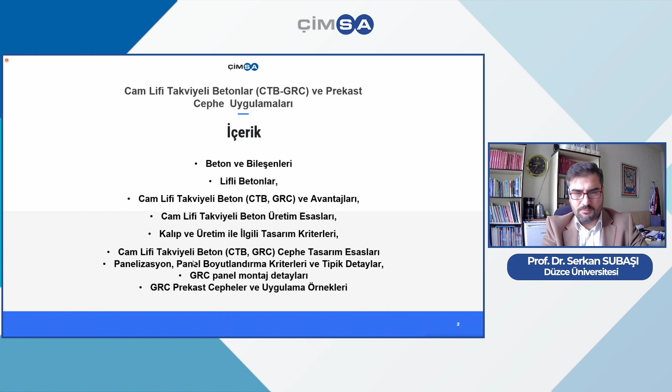When we look at the content, I'm going to speak about concrete and its components, and of course fiber concrete structures, GRCs, and their advantages. Also the concrete production features and advantages, molding and production, related design criteria, GRC type of facade applications, mounting details, panelization, precast facade, and practicing examples will be shared with you.

When we look at the components, concrete in itself is basically composed of aggregate, sand, cement, and water, and it has got a plastic form in its fluid form in the beginning. It is one of the major popular products in construction. It's not composed of actually just these three components.

There are different types of polymeric contents and some chemical contents, and also some additives or fiber type of supplementary materials. In architectural designs, some color pigments are also being added. When we look at those components, a few of them or all of them do have certain amounts which are brought together, and the design of the concrete is diversified according to these different types of contents.

When we look at fiber concrete structures, of course they do have a different resistance capacity, deformation capacity, and yielding capacity. When we compare and contrast, it has got some important features.

In order to enhance and empower the structure and make it more resistant in different parameters, different types of additives, polymeric or mineral type of natural organic fiber sources are being added in the content. Low amount and very homogeneous fiber structures provide an opportunity for shearing capacity, increasing the level of resistance, and bringing a better outcome in appearance.

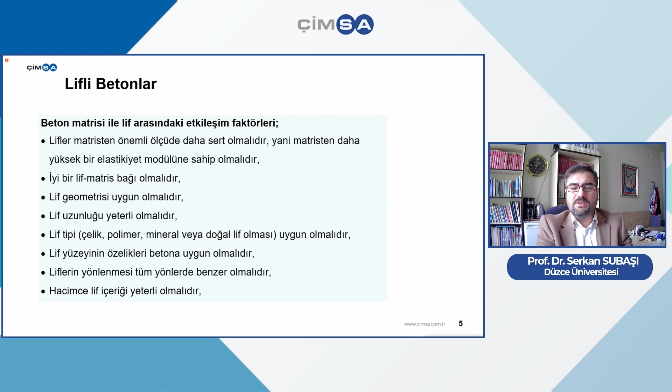Some of the molding regions are not, of course, distributing the fibers in certain directions. And those directions of the fibers in different axes, of course, bring a weaker or a stronger structure. And for this reason, it is very important to look at the volume of the content of fibers.

And when we look at the ratios for abrasion and for corrosion, and also when we look at the bending, it is reaching up to 200. And when we look at the cavitation erosion resistance, it is changing between 200 and 300 with the adding of the fibers.

And of course, there are different types of fibers, which you can see on this table. Generally, the steel fibers are preferred majorly in the field, and for their volume, weight, and also mechanical features, they bring out a very high level of performance. And especially according to the developments of fiber technologies, different producers have new fiber sources, and every other day they are gaining superior features and enabling us to create new concrete types.

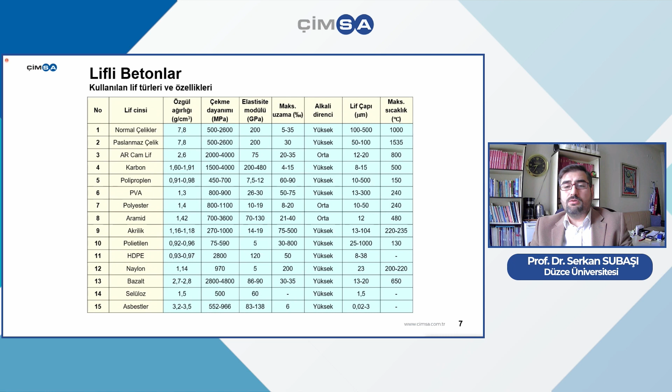And actually, what is important for the reinforcement of the concrete? Reinforcement of the concrete is enforced with glass fibers in this topic. In order to create the concrete blocks, by making use of some steel sticks and with certain integration of different components, it is possible to reinforce the concrete structure. But moreover, it is possible to reinforce the concrete by adding glass fiber.

Besides the steel fibers and, of course, alkali glass fibers and basalt and carbon fiber types, different fiber technologies at different levels may be added, and different features of the concrete can be reinforced. When we look at it in a simple way, as you can see, a simple structured concrete, there is a structural change when it doesn't have any constraint and straining contained. And of course, when we look at the energy capacity, it is very high in the deformation rates, and cement composites can be gained from the structure.

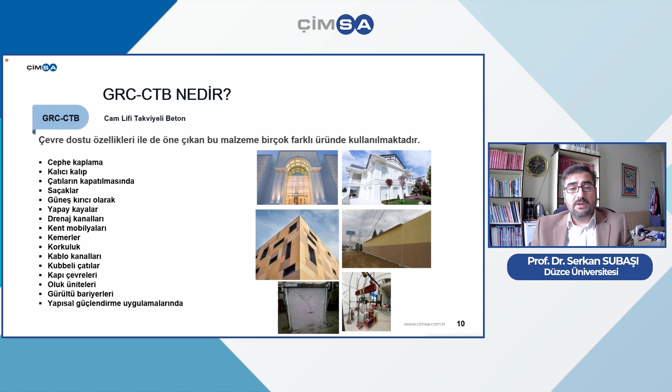And last but not least, recent research points out that in structural reinforcement practices, glass fiber is providing a great opportunity in the renovation and restoration of historical buildings, and also in different types of concrete reinforcement activities. It provides a huge opportunity.

When we look at the technical features and compare them, pressure resistance is 20 to 50 in normal concrete structures, but it reaches up to 50 or 80 in GRCs. The most important feature is the bending resistance, of course. The LOP value in the matrix structure shows us the resistance until it cracks, and it is approximately 10 megapascal. And when we look at the bending resistance MOR value, it reaches between 18 and 30.

When you produce these concrete types with woven fibers, these values rise. It is possible to make them better. The elasticity modulus is approximately 10 to 20 gigapascal, and water absorption is 3 to 10. In GRCs, it is possible to make the absorption level lower. Because of its structure, it has a carbonation depth in millimeter values, and the thickness changes between 10 and 15 millimeters in facade coating. There are some thicknesses below 3 centimeters. The density changes between 1.9 and 2.2, and the weight changes between 25 and 45 per meter square.

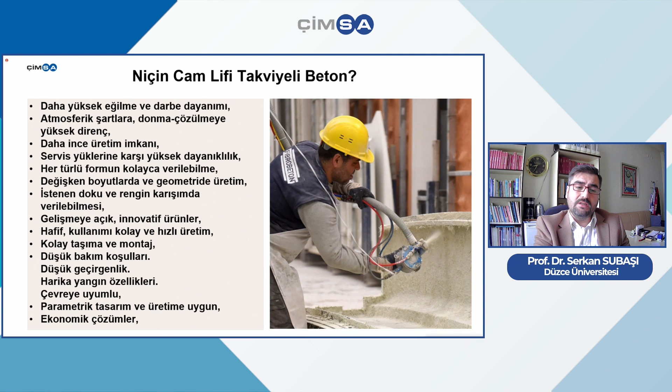The architectural world is really in favor of this product because of its diversified options, and it is increasing day by day. In maintenance conditions and different structures, it brings an advantage. It has a visual advantage with its colors and appearance. It has a very diversified color scale. When you use it with white cement, it is possible to use different combinations of color pigments, like terracotta tones, for example, in different varieties. These coating concretes can also be colored afterwards, multiplying the color scale.

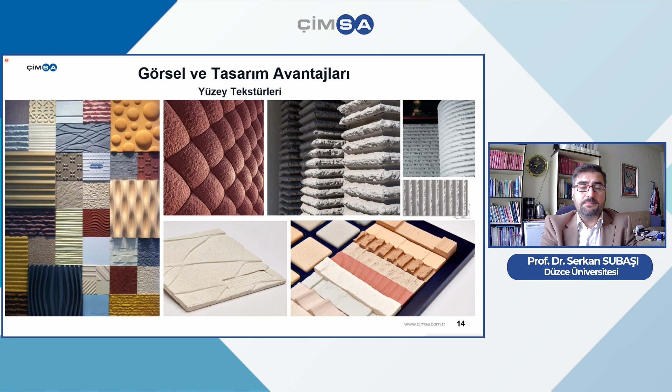The surface texture is a very important feature. The surface texture is related to the molding technology. Any type of surface texture is possible to shape glass fiber reinforced concrete, and molding applications starting from wooden molds to polyester and polyethylene types can be used during production. The thickness, depth, and size of the molds change. When we look at the sizing of the forms, it is an extraordinary, wide-scaled, and very thin layered type of product. So it's a very special type of concrete being produced.

And the major limitation is the logistic limitation. The architects are in need of such kind of aesthetic features at any size or at any structure. It is possible to obtain it. However, the transportation of these products is really making it hard to be managed. That's the only problem that can be counted.

And when we look at the finishing surfaces, it is an aggregated finishing surface agent, and it is bringing different advantages because there are different types of applications which it can be applied. One of them is the sanding application. Different designs and textures are being created, and also acidic bath is another type of application.

And another important feature is the retarding. As a retarding agent, it gives a different structure, and with pressured water, different types of finishings on surfaces are possible to be obtained.

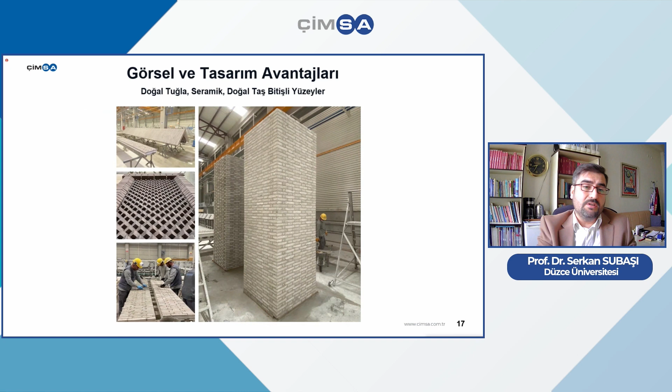And moreover than that, when we look at the surface features, natural types of ceramic tiles are able to be applied. So it is possible to produce shell-like structures, cross-like structures by the help of glass fiber as a coating material.

And glass fibers are changing between 4 and 5. And when we look at premix types, it is 2.5 and 3.5. And water cement ratio is 30-35%.

There are different types of basic applications, like, of course, the spraying technology, which we use. And other than the blasting technology, we do have the premix technology, and it is more durable for shearing resistance. And the homogeneous structure and also the hardness of adding fresh concrete inside it, the sizes are declining to maximum 6 millimeters or 25 millimeters. You see the application in the premix situations.

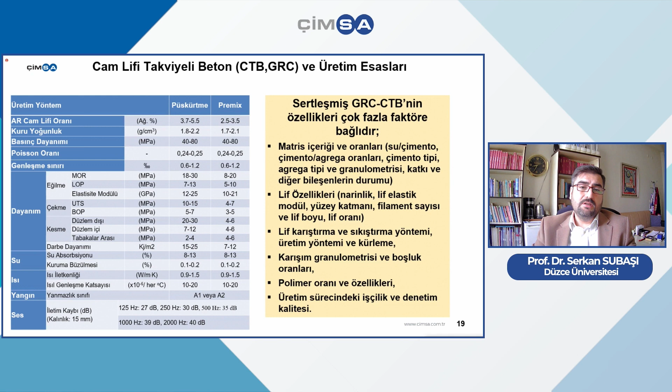And of course, another important methodology which defines the structure is curing, and also the chemicals inside the mixtures. Without spending any further, polymeric features or structures are possible to be used. And of course, the quality of the laborship and also the inspection is making it possible to obtain a better quality.

And when we look at the concrete structures, according to the study in these molds, we have glass fiber reinforced concrete used in these molds. Now it will be put on a steel carcass, which will be installed to this concrete molded material, or it can be directly solidified with the concrete from this carcass as well.

After the use of sidings, the logistics comes into place, and under appropriate conditions, their transportation can be made. Of course, in the field, the installation teams also can very easily install it to the carrier systems by use of cranes.

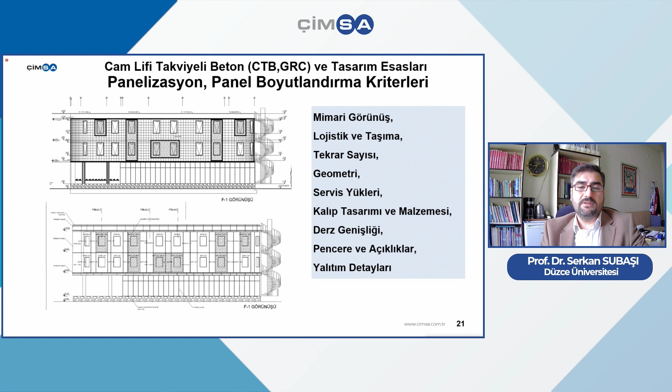Various production methodologies can be chosen according to the designs. Of course, we have to look into the geometry, the service loads, the window placements, and similar issues as well. As you can see here, various forms can be produced for surfaces, especially for amorphous surfaces, through different molding performance, let us say. But all these molds that are prepared either from polyester or polyurethane can be used to mold concrete and then finalized with a spray as glass fiber reinforced concrete works.

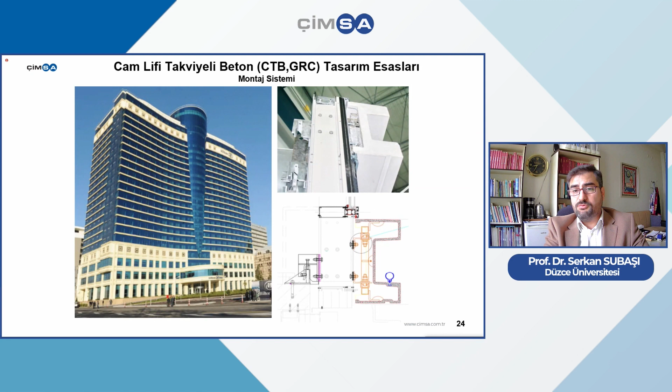Here is the steel carcass system on which it is installed. As you can see, during the installation, in a safe and secure way, the structure is fortified and solidified, designed together. Of course, when designing these connective structures, we need to be sure that the special requirements of safety are also met under utilization conditions in the world. There are various installation equipment producers worldwide who are complying with these safety procedures.

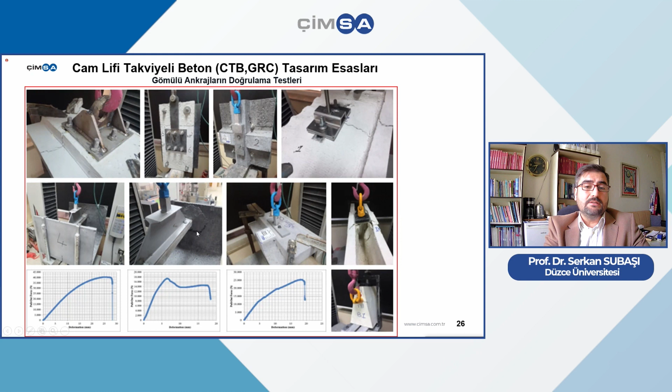As you can see here, the production of the equipment is also important in the installation stage, and the equipment necessary for installation is tested to see whether it has the performance stated in the project briefs. So performance tests are applied also to the installation and reinforcement factors. About precast siding in the systems where these details are solved, you can see here the structural examples.

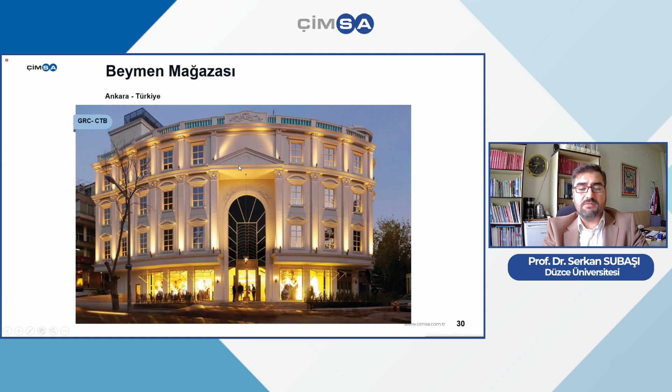For example, in our country, Mardan Palace, the sidings here were applied with glass fiber reinforced concrete. As you can see here, there are much more complex examples of these sidings as well, with various methodologies. Different fixtures and designs can be combined. This is a building from Ankara. You can see here the entire siding except for the windows is carried out with glass fiber reinforced concrete.

This is from Moscow, a swimming pool project. I would like to draw your attention to the artistic side as well. You can see here many artistic works carried out for the sidings, for the facades with the concrete factors. These are all quite lyric in their applications. Another example from Antalya. Here you can see the outer siding combined with lighting factors for a beautiful application as well.

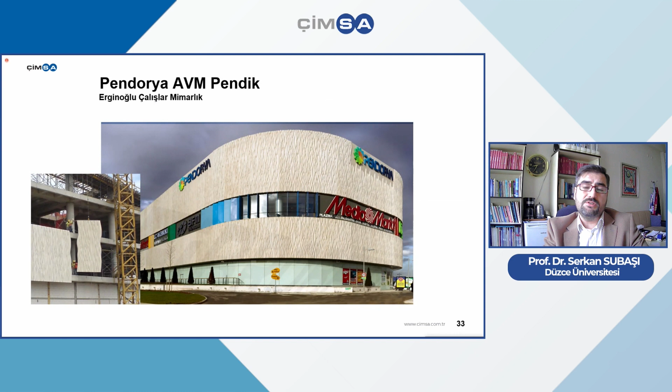Here, another example from Istanbul, Pendorya shopping mall, for the outer siding, one of the different methodologies and molds, with quite an aesthetic view. Apart from these, another example from the world is the Parliament building of Georgia. You can see here the entrance is again a full shell designed with glass fiber reinforced concrete.

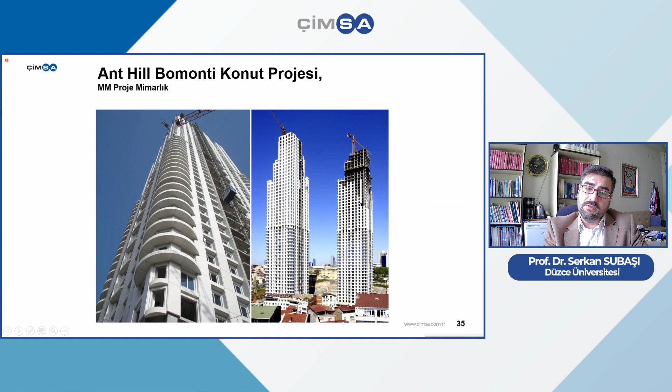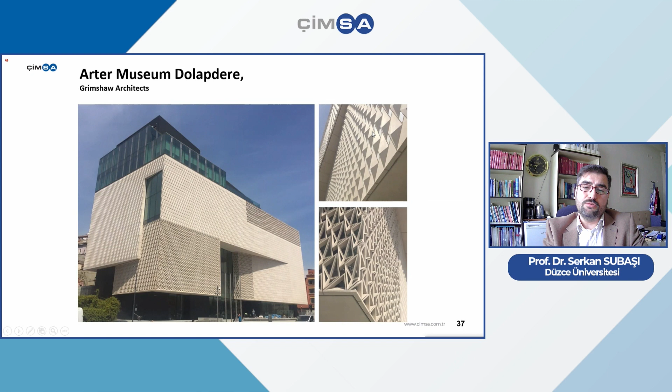Again, from our country, a residential project here for siding with glass fiber reinforced concrete. Here is another project for the outer siding, an example of similar methodologies of concrete. Here again in Dolapdere Arter Museum, for solar deflection as well as other advantages, this outer siding was preferred. Here again, the project East Marina has preferred these white colored elements for outer sidings.

I hope my presentation was beneficial for you. I thank you very much for your interest. And if you have any questions, I would be happy to answer them.

We would like to thank Dr. Subaşı for his very informative speech. We do have a few questions. As you know, white cement is used for precast and is already in the market. The implementers are saying that there are some cracks with GRC applications, especially for wide and broad application fields. What should they be careful about in such cases to prevent it?

Of course, cracking in concrete is actually an indicator that the cement design and proportioning is not appropriate. Maybe the percentages of the agents, the expansion agents, or other additive ratios need to be checked through a detailed analysis. And I believe that when these rates are correct, there will be no troubles.

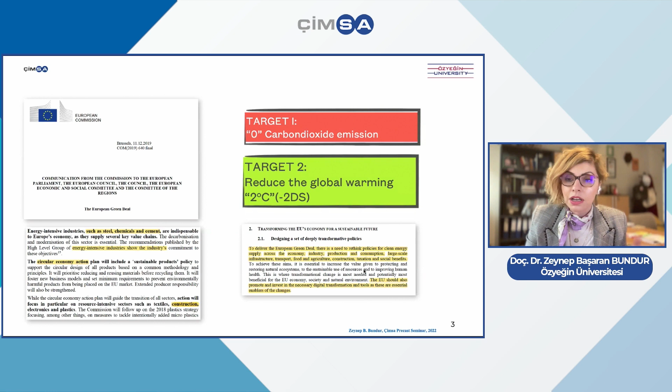Today, I will be talking to you about the state of things as well as what we are doing to keep up with it. As everyone mentioned, in the construction sector at the moment, one of the most important focuses is on sustainability, and it has to do with waste management, and usage of green material is already on our agenda for sustainability. But now we have targets as well, which were determined by the Paris Accord and the commitments for zero carbon dioxide emissions and, of course, reduction of global warming by 2 degrees.

And it's also a very keen commitment. This actually requires what we call a breakthrough. We have our task cut out for us as the producers, as the designers, as the academia, because it requires a very different outlook towards this sector. According to the most recent reports of the EU and the academia, it has to do with 2 steps. The first step has to do with breakthrough developments: to have the cement industry or the construction industry actually capture that carbon dioxide and give it back to recycling. This requires very high budgets, because we have very high capacity production as well, and it is highly costly as well as very difficult to implement and to practice.

And the second step has to do with the management of the waste of cement factories, maybe reuse of this waste material, or usage of waste aggregates for, again, cement and concrete production. And last but not least, very important for this webinar as well, is structural optimization. What's important at this point is the usage of precast concrete. Following in the footsteps of Europe, we see whole buildings constructed by precast elements, including the beams and walls. Everything needs to be brought into the field and used in the construction. And we need to do this as well.

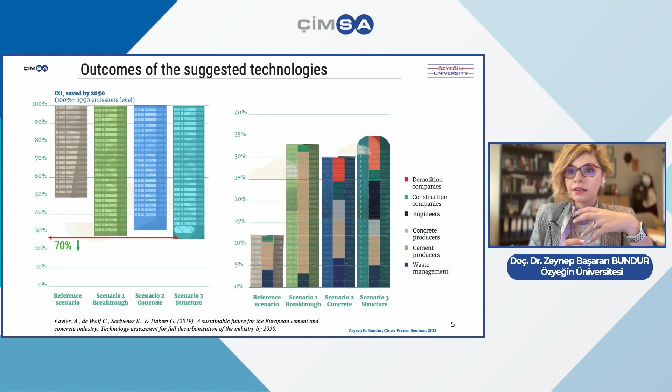When modeling this, I couldn't really get the transportation part, because I don't know whether the carbon footprint of the trucks and transportation costs during this circular economy was also included in this report or not. But in total, we see that this is a very efficient methodology, completely aligned with the Paris Accords as well.

And so in that sense, we see we need a very broad perspective towards this, where everyone can take their part and add it to a holistic outcome for the cement industry.

And I wanted to also talk about what we are doing at the moment with our R&D applications and practices, because in the future, we can even be in a position to construct a one-story building only with 3D printing. This is actually what our R&D is focused on.

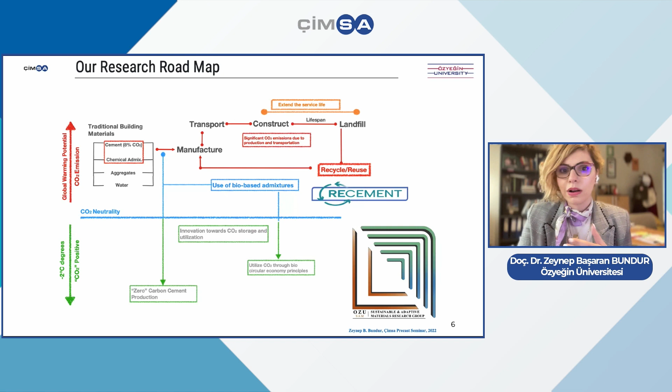Sustainability towards zero carbon dioxide is the utilization of recycled materials and reuse of waste materials, and digital manufacturing through 3D printers. Actually, what we're doing is not truly digital manufacturing, it's still 3D printing, but there are many steps as to how we can optimize this in field construction, factory construction, and production and manufacturing, combined manufacturing, mixture manufacturing.

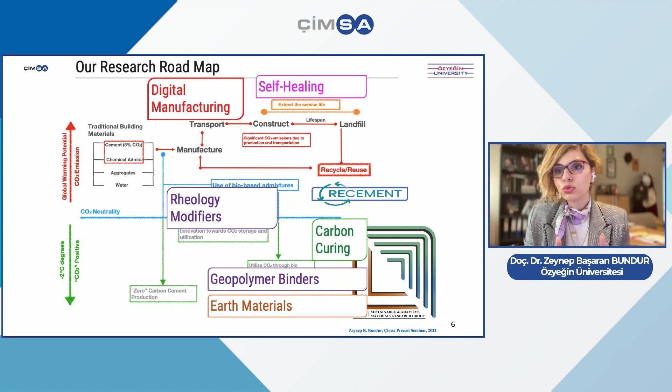And this is all very important, and also reuse in that sense, of material which will allow for a longer lifespan. And besides lifespan, we need to have concern for the environment, using less additives and less agents and less extra material, and using geopolymers as binders or earth materials for additives. These are all part of the R&D processes that we are carrying out at the moment.

These might seem a little too much of a fantasy at the moment, but it is on its way, it is in the pipeline. I want to talk to you today, for example, about what we are doing with concrete through 3D printing.

It might sound like a very recent application in the last 5-6 years, but it has a long period of preparation in the 20th century, especially in the background.

But what is going to be the perspective? Are we going to print precast elements and combine them in the field, or are we going to have this printing process carried out in the field itself? What kind of advantages do we have?

There are no molds, there is no waste material, so actually it optimizes resource utilization, and it is fast in terms of manufacturing, and it is reducing labor force as well, and thus increasing safety in the manufacturing area.

And as for cost, it's a question mark. I can't say it is actually cheaper at the moment, but when you think of the cost of molds and the cost of labor force and other areas and waste management, we can say that it is at least break even, maybe, because you don't have to use molds anymore. You can get one 3D printer and use it for a very long time to print various materials.

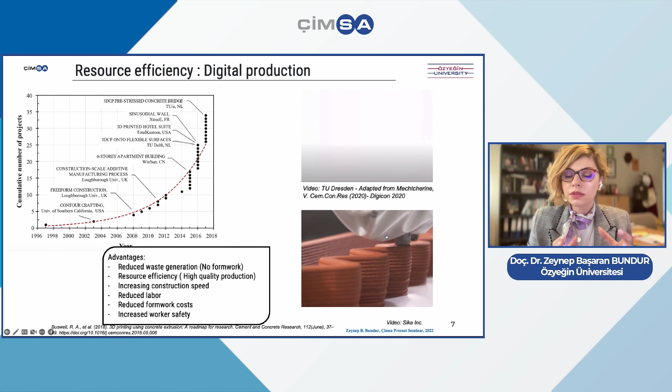Or you can have a much more fluent material produced and printed through extrusion, in a very fast methodology. So we don't have a single right or wrong or appropriate material for printing, because there are different types of printers, and different types of materials can be printed based on the types of these printers.

And the material needs to be reworkable, and this is actually the thixotropy of the material in itself. This is a system in itself. The material and the printer need to be in communication, and an optimization process and coordination process has to be carried out for this. We can play with the materials using chemicals, and maybe use the timing of the finishing.

We can use fiber to reinforce it, especially for early stages, and we can rework it through clay. Everyone has a difference in terms of design, but at the end of the day, it comes out of a nozzle and it is workable and printable material. In that sense, it is an optimization. From the printer side, we can have a tank design for printable material, pump design for material transport, and nozzle design for the printing resolution.

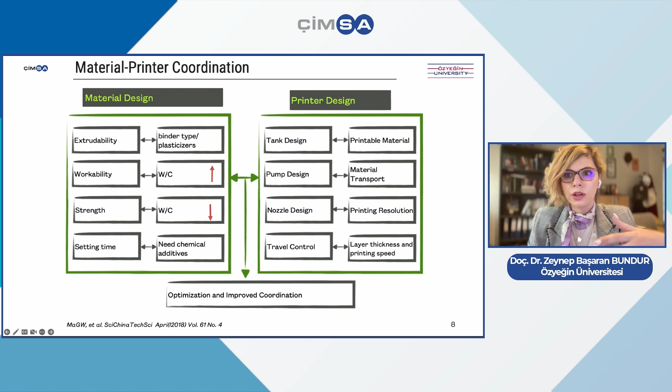We want to have this easily very practical in the field. So not a gantry type, but a different type of printer that could be more practical in the field. We're trying to include the printers in this renovation phase, in this R&D phase.

What about the speed of the printer and the alignment of the speed of the printer with the structure of the material? We can have a material design for each printer, and we can adjust each printer for different types of materials. So in that sense, they're interchangeable.

What's important here is that it's extrudable, so fluid enough to be extrudable, but it also needs to be workable. It needs to have a basis strength initially, to be able to have a strong basis and fundament. So it needs to be fluid until it comes out of the nozzle, and after it comes out of the nozzle, it needs to be printable layer by layer. That's where the chemicals come into effect.

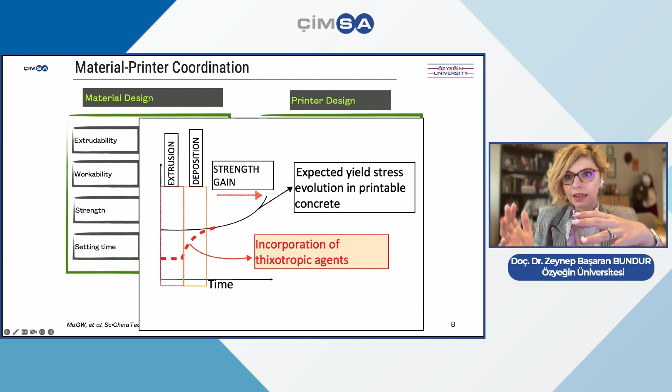After the printing, we need to have a yield stress evolution in the printable concrete. That's where we need incorporation of thixotropic agents and properties. We have different approaches in that sense.

Here, we can have ordinary Portland cement, and we can have mineral additive and calcium aluminate cements as well. Geopolymer mixes are very advantageous here because they can provide instant workability. Some revalorized end-of-life materials are sometimes very important. Biological additives can also increase the extrusion properties. Nanomaterials are also possible to use, so the concrete design is also adaptable to digital manufacturing.

This means, in fact, that the world is moving towards digitalization on one point, but to be able to do that, we're taking a step back from sustainability in terms of being able to print concrete through cement, using more excess cement. So we need to have renovation and R&D exactly at this point. We need to work on how we can reduce the impact of the carbon footprint for this digital manufacturing. This is where the geopolymers come in, and this is where the biological factors come in to replace the ordinary cement.

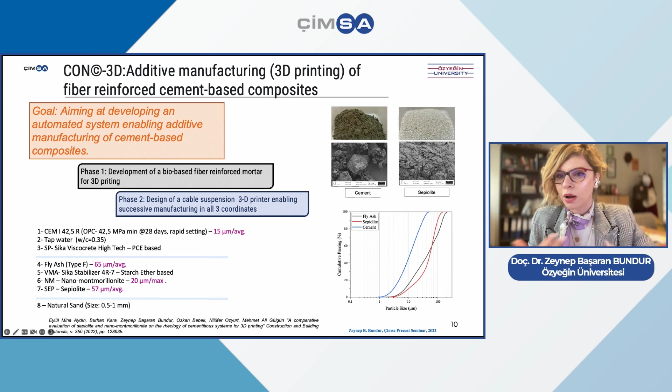We also tried a nano clay to see the differences in our project. In that sense, we can have shear rates, as you can see here. It's a little bit specific, but you can see the values.

When we look at quality control for 3D printers, we can have shear and slump and pressure resistance for standard concrete as well. That's actually the basis. The challenge is that there is no standard quality control test as well.

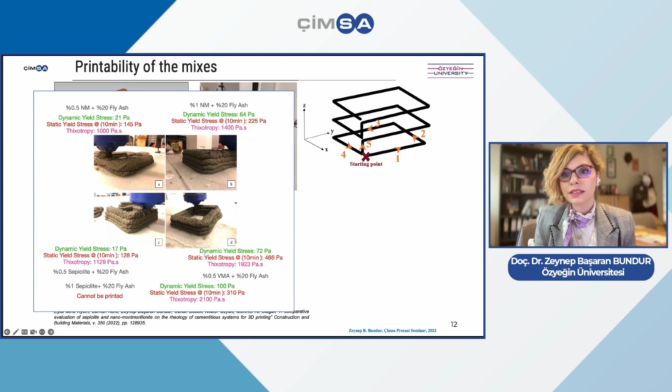So we thought there needs to be a measurement system for this, a quality control system, which needs to be integrated into the printer itself for effective usage. We thought that in a closed loop, we can have a quality control system applied to the printer itself, not just for the mortar or materials, but for the printer itself, to enable both to optimize themselves within a closed loop system.

Here we see that our own printer that we manufacture has different properties, and we see different analyses for printing material for different extruders. We determined maximum and minimum values within which that printer can be used for that material. And also there is another biological additive factor—mixtures, biocrete, for biologically positive cement—and its bacterial cells related to rheology modifiers.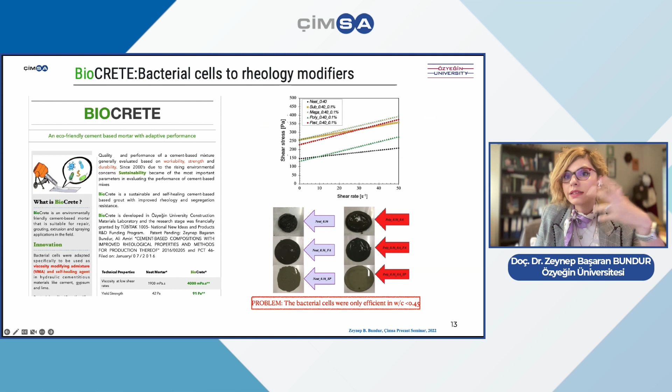It does have a few challenges of itself as well. The innovation in our project worked based on solving these challenges, and combining sepiolite—adding a certain amount of sepiolite and bacteria to the mixture—was a positive outcome for our study. We didn't have a too thick mortar, but not too fluid either, so we had a very appropriate mortar and flow.

I don't know what kind of molecular difference there is—I cannot explain the technicalities of this—but we had a wider printable area through this. And all this material allowed us to have a more homogeneous outflow.

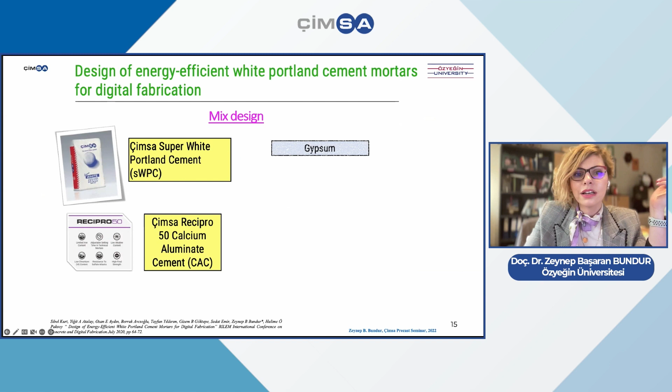How did we start this 3D printer? By the help of Çimsa, we started. We started with Sibel Hanım, with a white cement, a white Portland cement, and Çimsa's Recipro 50 calcium aluminate. We tried how we can make it white, and at the same time, how can we provide an energy benefit—can we bring a social benefit? We started just before the pandemic, a few months before, but we had some very good results before it started.

Çimsa's general design parameters, like the use of gypsum and sulfate, and powder dispersant and super plasticizer, have been used. Silica sand, polymer additive, and polyamide fibers were used. We designed a white cement, and at the same time, phase-changing materials were added in order to provide energy efficiency. Because of their round shape, they helped us during the extrusion phase.

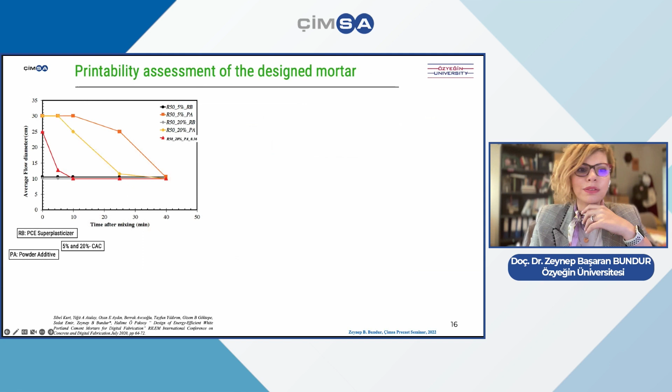We started with some small experiments. We could not bring them to rheological experiments—it was just before the pandemic. Different types of parts were produced. What was beautiful about it? According to the dosage that we wanted, we were able to wait 5 minutes and print it, or wait 10 minutes and print it. We were able to change the nozzle sizes, and they worked in different ways.

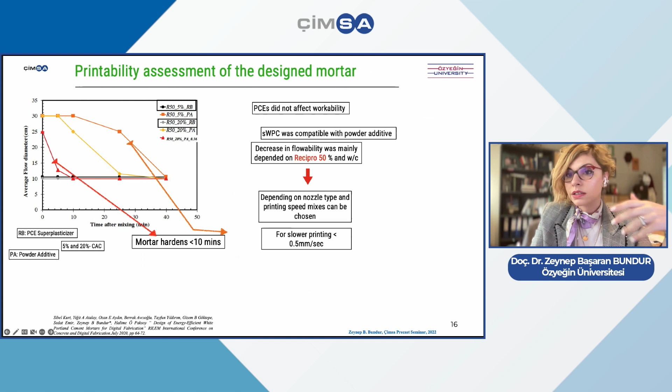Is it possible to squeeze it? Is it possible to use it in different nozzle diameters? How fast can it be? It was speeding up very easily depending on nozzle type and printing speed. It was possible to have a very fast printout, and we achieved this result.

The other project started later on. This was the first step we started with, and we learned a lot. We made a lot of mistakes, and we learned a lot from them. However, what is the main topic here? The white cement and also the additive content, because of its environmental impact, will be the striking point. We need to approach it in an environmentally friendly way.

And for the cement, what we are actually committing: we are developing bio-based healing agents, and for more than 10 years we are developing these products, and also facade coating and also powder additives, and also to implement technology with geopolymer mortars to reduce duration of heat curing for geopolymerization and improve the printability of the mortar.

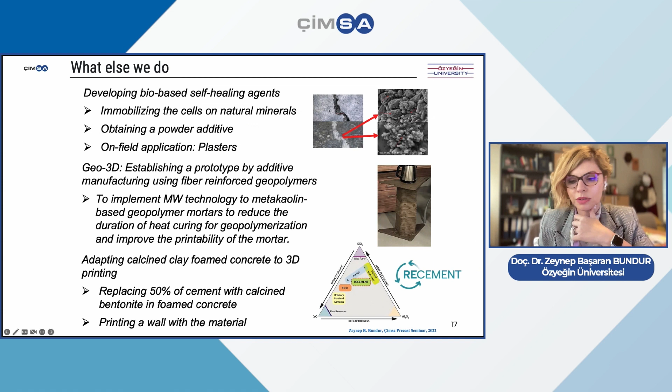We have applied a microwave, and we are producing coffee tables and also waste bins with these 3D prints. And we do have an EU project, a RECEMENT project. All of the waste of mines and ceramic and also other waste materials are being recycled and reused. We do have such kind of an upcycling project.

We are a very huge research group, not only students. We do have mechanical engineers and industrial engineers and also civil engineers. And many of our projects are being supported by TÜBİTAK.

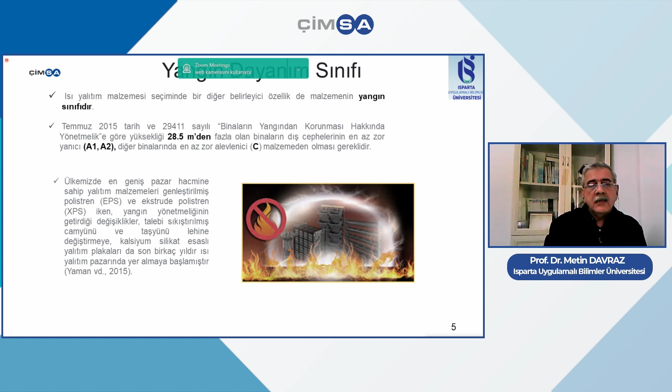And for a long period of time in our country, when we look at the insulation materials, EPS or XPS, we were using them as the extension material. Now it has been replaced with thermal insulation plasters. And when we look at the traditional thermal insulation materials, the unit price for EPS is the lowest value.

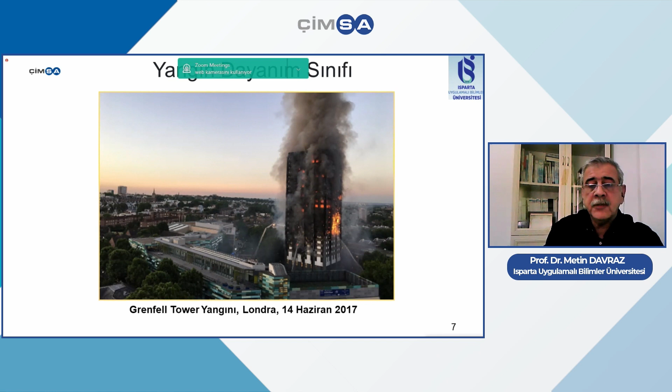And when we look at the external facades of the buildings and the fire types, for the firefighters, the situation with the flames is very hard. This is the Grenfell Tower fire in London on the 14th of June, 2017. Starting from the fourth floor, it spread to the whole facade. Unfortunately, 72 people lost their lives, and the firefighters' intervention took 24 hours to extinguish the fire.

When the building is higher than 28.50 meters, non-flammable materials, A1, A2, and also flame retardants should be used in the content. And when we look at the systems which are less than 28.5 meters, 1.5 meters should be coated with non-flammable material. And if the building height is more than 6.50 meters, then the windows, window panels and all of the voids at the edges of the building, at least 15 centimeters, or from the upper side 30 centimeters, should be coated with non-flammable barriers.

And it is possible to make use of other non-flammable materials. There are fireproof insulation materials that can be used independently on the facade of the buildings. And the traditional thermal insulation mounting approach is causing some problematic issues due to the structure of the surface, and sometimes they are not prepared according to the appropriate techniques.

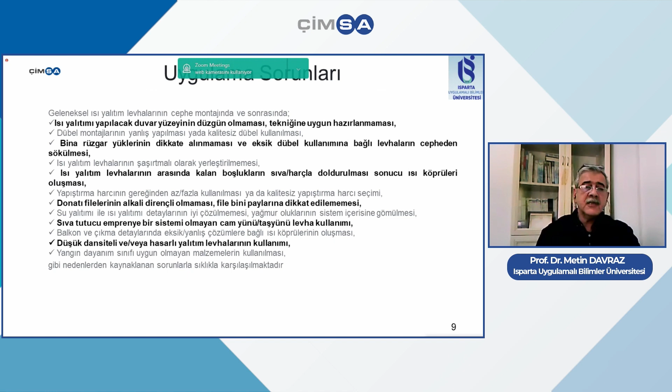And the void between the thermal insulation plates is filled with cement, sometimes with some foam. This kind of disqualified application makes the structure of the building weak. And due to different reasons, application failures, it is possible to have less insulation impact.

When we move towards thermal insulation plaster, the Ministry of Environment has regulation and legislation, and also the standard TS EN 998-1 is a standard which we cannot ignore. The basic condition of thermal insulation plasters is that it should be less than 0.065 watt. And in our country, more than 50 companies are producing thermal plaster.

In order to be named as an insulation plaster, the value of 0.065 W/mK should be provided as a standard by these more than 50 companies. We don't know the numbers.

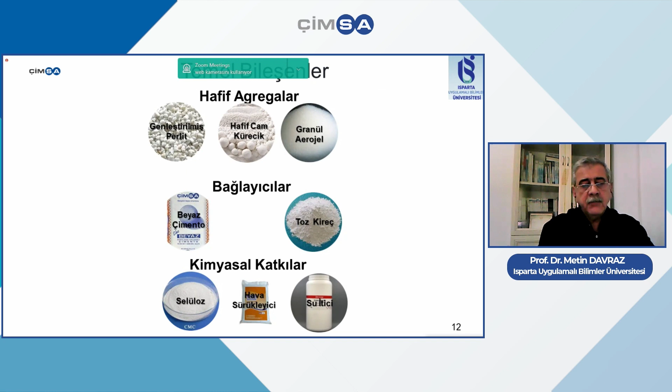And when we go through the chemical additives, CMC type of powder cellulose and also dust polymers are present. These are the basic two components. And in order to have less water absorption, we use perlite and we use hydrophobic agents, water repellent hydrophobic agents. It's a mandatory condition.

The thermal insulation plasters have 4 basic features. The hardened mortar has a dry density, and of course heat permeability is very important. When we look at this plaster type, the dry unit volume is 300 kilograms per meter cube. The heat conductivity coefficient value is 0.065, the pressure resistance is 400 kilopascal, and the capillary water absorption coefficient is, as you can see.

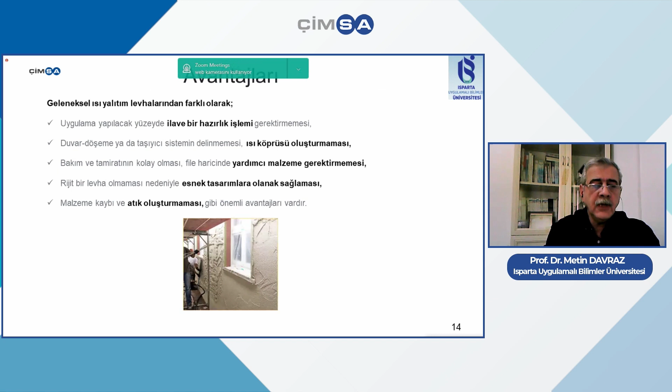Now, what is different from the traditional thermal insulation plates? Actually, the surface does not need to be prepared, and you should not drill the carrying walls, and it is very easy to maintain, it doesn't need any additional material, and it is flexible in any designs, so it is not a rigid type of plate, and of course it is not creating any waste.

Additionally, when you start to use thermal insulation plasters, there may be certain problems we can come across. First of all, kraft bags are used to transfer the product, water is added, and it is mixed manually or with a machine. The biggest disadvantage is the heat conductivity value. It is not fixed, not permanent. And capillary water absorption and mechanical resistance problems may also occur.

And we have a very low amount of studies in our country, in our literature. Only Akbulut's 2018 study is very well known. In this study, based on TS-EN 998-1, 5 different companies prepared samples from their thermal insulation plasters, and their bending resistance, pressure resistance, mechanical features, volumes, capillary water absorption, and heat conductivities were examined.

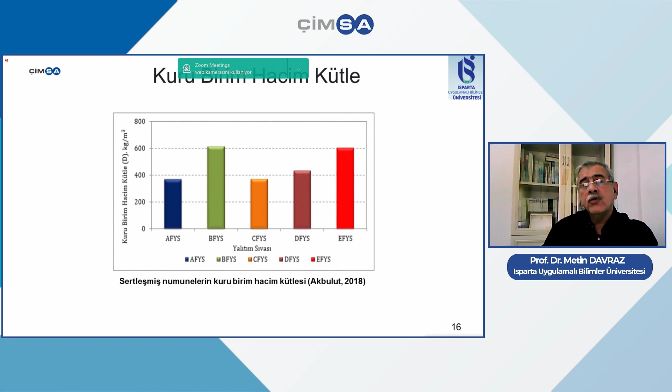The appropriate samples were researched here, and you can see 2 out of 5 samples are below the value, while the other 3 are above the 400 value. And here again you can see the water absorption coefficient for the 5 insulation plaster samples, and the results. See here, 3 of them are above the 0.8 level.

For pressure resistance, you can see it as a function of the unit volume mass. For 28 days, you can see the results of the 5 insulation plaster samples again. So 3 of them are again above a certain level. For heat transfer coefficients, we can see the heat conduction coefficient and the results of the samples. As the volume grows, its thermal conductivity also changes.

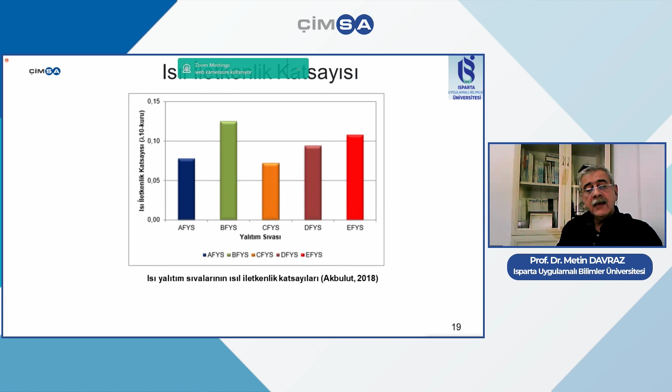2 of the 5 samples, based on the standards, are quite above the required levels. The other 3 are below the level of 0.10, as you can see here. This means that none of these insulation plasters actually meet the values given in the results here.

Of course, this is based on the specific study, but rather than responsibility for producers, I would like to say that the lack of appropriate equipment for measuring these properties is one of the reasons that misguiding conclusions can be reached in measurements and tests, especially for thermal conductivity.

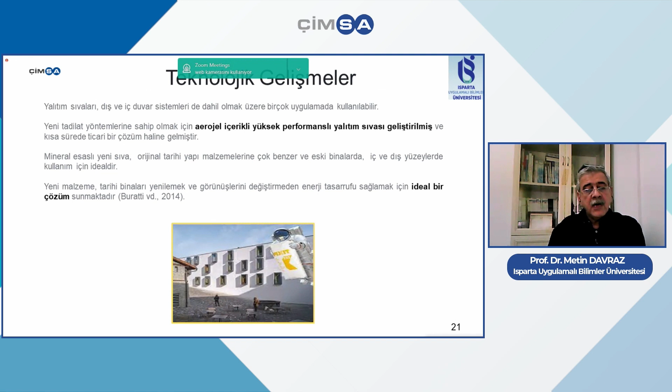So insulation plasters are products that can be used with exterior as well as interior wall systems. So we have aerogel-added high performance insulation plaster, which was developed and turned into a commercial solution in a very short time. Especially new plaster with a mineral essence can be used for original historical building materials, as well as for interior and exterior surfaces. The new material proposes an ideal solution in this sense.

In Europe, for private and special projects, since it's about Europe, I had to give a brand as well. You can check it. Fixit 222 is the brand, which is a special mineral plaster with granulated aerogel in it, with white cement, and also a high-performance binder. Historical buildings and buildings under protection are the areas where Fixit can be used for both internal and external walls.

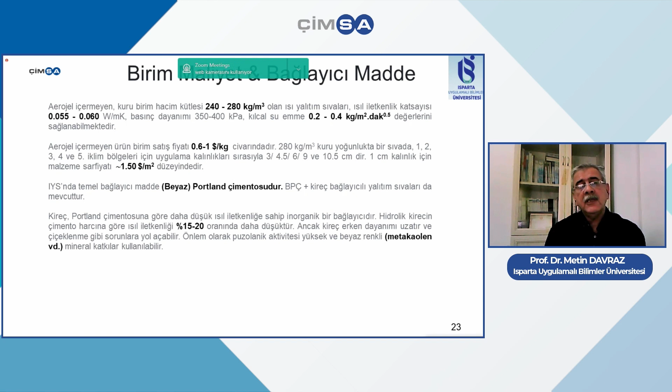So the lime ensures that there is a lower heat conductivity, as you can see from the different values on the slide. So as a result, I can say that certain thermal, mechanical, and physical properties need to be maintained. These being maintained, heat insulation plasters are an alternative material to the traditional heat insulation materials.

And of course, the producers need to refrain from misguiding statements. Quality control experiments need to be focused on, and frequent supervision and controls by authorities need to be conducted. And support from the ministry level and public authorities needs to be maintained for R&D work, as well as from institutions such as perlite producers and cement producers.

And of course, industry-academia cooperation needs to be maintained for research into the topic, and industry representatives such as Çimsa need to be very active in the research, as well as in setting the standards in the market for this new material.

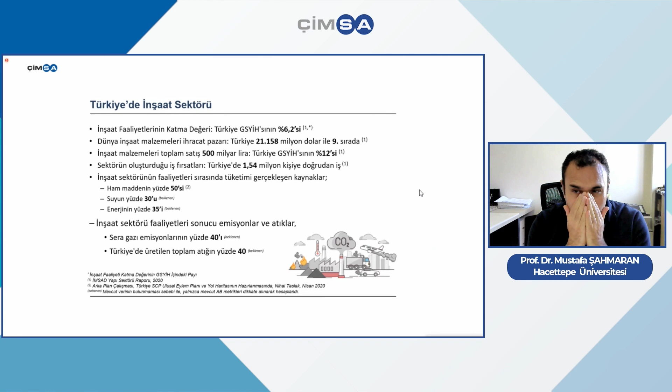So let's look into how Turkey is doing in all these regards, and after that I will talk to you more in detail. When we look at the construction sector in Turkey, as in the rest of the world, we see that construction activities are still focusing on linear economy.

So turning it into a circular economy is a main activity point, as well as more than 40% of the total waste is from construction, and it is one of the main producers of waste. We have 1.5 million people employed directly by the construction sector, and about 12% of the GDP of Turkey is from this sector. So we need to focus on this sector as a factor for environment.

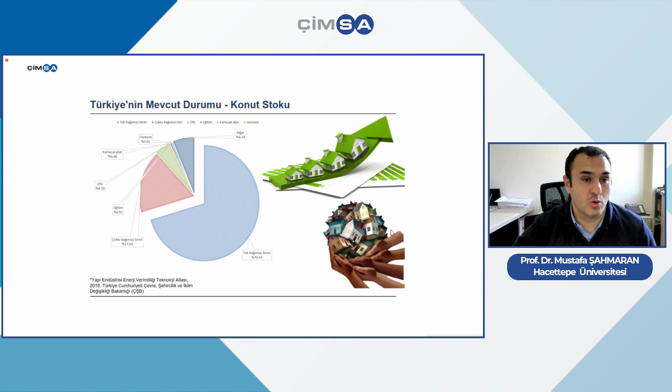So looking at the residence inventory in Turkey, we see that residential is actually a major part, and a very important part of that is actually independent residences, single residences. So we see that as Turkey, as we can see also, the measures taken for the construction industry is insufficient in terms of the demand and the supply for residential construction.

Of course, we see that in Turkey, the population and the immigration is also leading to an extending need for residences as well as buildings, by the resident population as well as by the immigrants coming to our country. Let's look at the challenges and look at how we can solve them.

Another important challenge that Turkey faces are earthquakes, as in Düzce very recently. Unfortunately, Turkey is one of the major earthquake-prone countries in the region. We have more than 5 active fault lines, and with overpopulated areas. We see that since the beginning of the 20th century, all natural disasters in Turkey have heavily damaged more than 700,000 houses and buildings. And of course, all this work leads to a lot of construction and demolition wastes as well.

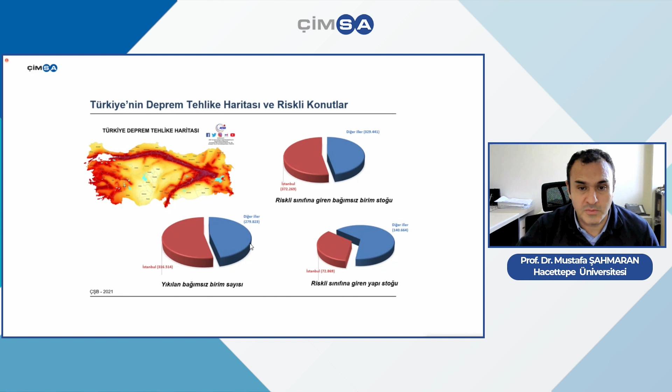Of course, the transformation, law on transformation of buildings under the risk of natural disasters has been a starting point for a lot of activities in the construction sector in Turkey. And here we can see that apart from that, in the world also, there's an ever-increasing urban population as well as developing economies, which lead to a constant need for construction of buildings, bridges and highways, as well as maintenance and rebuilding work, which leads to also demolition work.

Unfortunately, in our country, within the framework of infrastructure and urban transformation, we are expecting from a total building inventory of 19 to 20 million, about 600,000 are expected to be demolished and rebuilt, reconstructed. And we therefore expect a very high amount of waste.

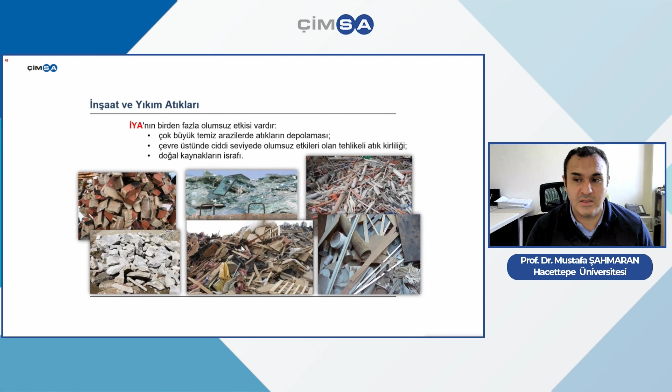And among the 28 members of the European Union in 2016, we see that 37% of the solid waste comes from this construction sector, which makes Turkey rank among the last of these EU member states as well. We are actually, due to demolition waste, wasting natural resources, and we need to have efficient solutions to minimize and mitigate these demolition wastes.

So all the factors within the value chain, the construction value chain, need to be included in the circular economy, which needs to be the basis of the new integrated construction sector in Turkey.

Very, very important. I'm sure you've seen similar slides in the past a lot in Turkey, but I want to emphasize once more. When we talk about circular economy, we talk about efficient use of all resources and all products throughout the entire lifespan of processes, renewable resources being used, reuse of waste, prevention of value loss, and longer utilization and higher functionality of the products and resources throughout the circular economy.

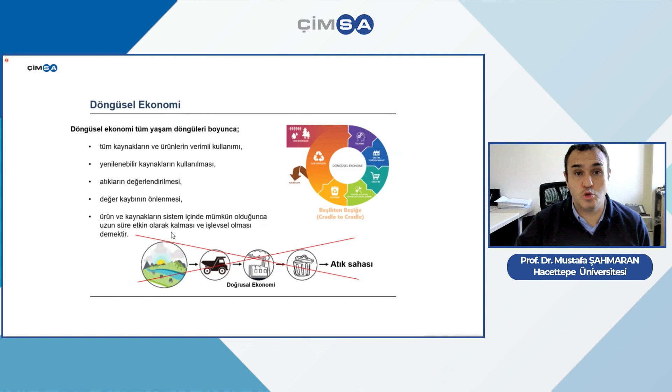So the main philosophy here is that from cradle to cradle, product design here is important. The target is to have a higher utilization lifespan for products, which is different than the linear economy, which says from cradle to the grave, but then from cradle to cradle, where the product does not end in an incinerator, but is reutilized for the basis of a new product or a new process. So we need to look into it in the circular economy methodology.

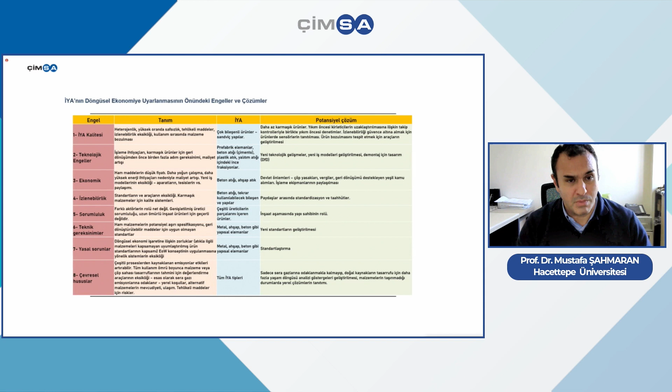Let me speak about the barriers and what solutions are being provided in our country. The first issue is quality, and the basic condition to make it standard is that all risky types of structures should be selectively deconstructed and demolished, and with pre-demolition inspections, they should be classified and hazardous materials should be somehow isolated.

With the recent developments in 2022, in the month of July, we now have a new demolition regulation. According to this demolition regulation, selective demolition is essential to be carried out. I don't know how much they will be practicing it on site, but we also have an EU project with Çimsa.

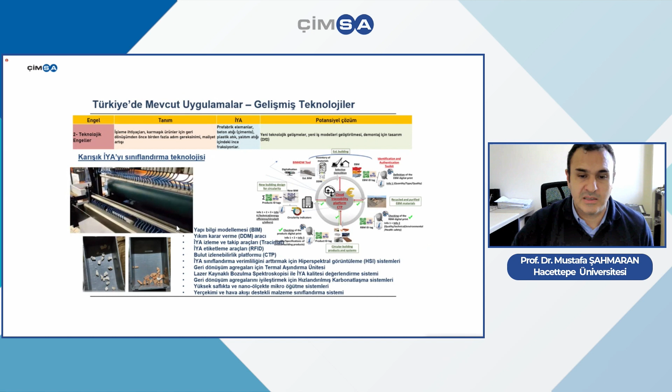C&D wastes are being classified and integrated into the recycling process. Another important process is being developed here.

The reusing of these materials in raw material production is also aimed, along with measuring their use as filling material, as basement material, as actual infrastructural material.

These C&D wastes are composed of natural materials, and they are going to be applied and upcycled. There are some technological barriers, however.

Another potential solution is Lego-type mountable designs. Whenever you need them, you match them and bring them together. Whenever you do not need them, you demount them and replace them. In such a situation, this approach will effectively transform and contribute to the recycling cycle of our country.

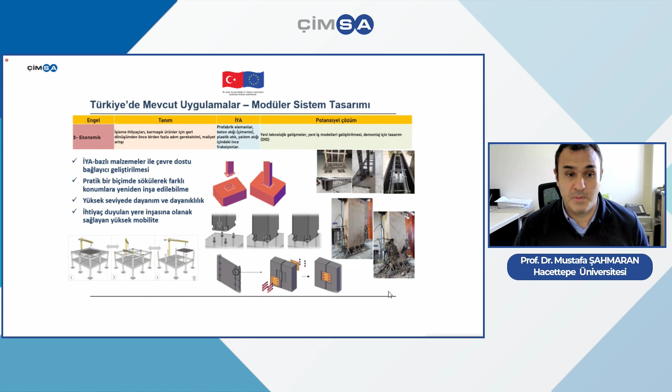Inside Hacettepe campus, the first demountable structure has been constructed. I'm going to show it to you very soon. By the end of this December, inside our campus, the supportive services building will be used for that purpose, and anytime you would like to see it, I can host you and bring you close.

I don't know whether you can see the video or not. Can you see the video? Yes, we can see the video.

This is the ready-made basement system. I'd like to speak about that soon. Almost 100% is composed of red bricks, and inside the cement we have integrated them, which creates a reddish color. It took us 2 days to construct this structure, and right now we are doing the last touches. It is demountable, and you can see the connections of the building. We do have such a structure.

With Çimsa, we have another collaborative project, and different from the previous structure, we have a real scale demountable basement, where all of the pipelines and infrastructural features and components will be demountable.

We especially wanted to see this in our new system. It is a totally circular system. Right now, where these materials come from, how they are classified, managed, transformed and cycled - we don't have a high level of awareness about this.

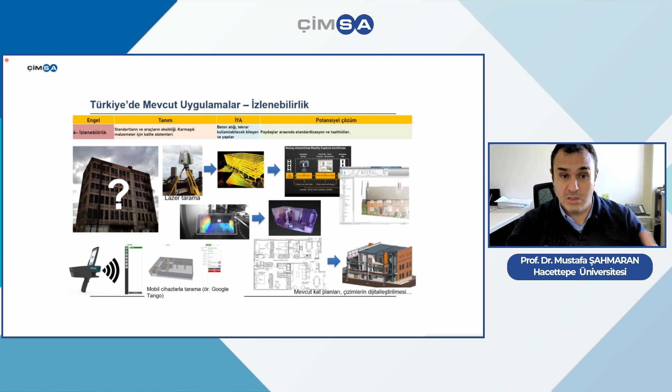For this reason, a cloud monitoring tracking platform and digital traceability solutions should be developed, sharing information among key actors, bringing transparency, and making use of blockchain technology to integrate and connect the systems. Çimsa is somehow included in this system, and it's an international project.

As Metin Bey has just showed, insulation materials are really very important. As I have mentioned to you, for a long period of time, extended responsibility for the users cannot be ignored. It is not something that you can throw away after a single use.

Within the framework of this responsibility, of course, AI needs to be implemented and integrated in the circular economy, and we should ignore the projects which are not taking into account reusability, and materials which cannot be demounted. The traditional materials in our country will be creating a huge barrier in the circular economy, and we do not have any hesitation. So all of a sudden, somehow, these irregular operations should be stopped.

In the slides, let me operate a video. It is really exciting us a lot, which Zeynep mentioned. We are mainly focusing on the waste and affordability issues. We are looking at reasonable budgets and the 3D printing technique, continuously. Concrete ink was being developed, and this was produced according to the construction codes. And the part which is not being used in any construction, this green concrete, applying it and adapting it to 3D printing is more economical.

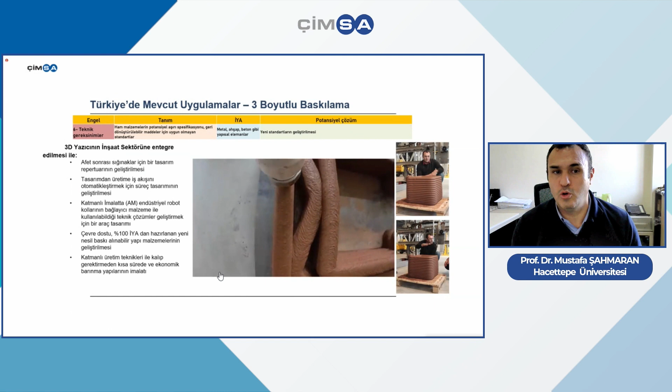In our preliminary calculations, these recipes are sometimes strange, but the 3D printing recipes approximately cost less. It is very close to the traditional cement and traditional concrete costs. And with the 3D printing methodology, the costs are declining 60%. This is what we aim to achieve. And also the construction wastes will be used on site for urgent operations. We will be establishing a production system.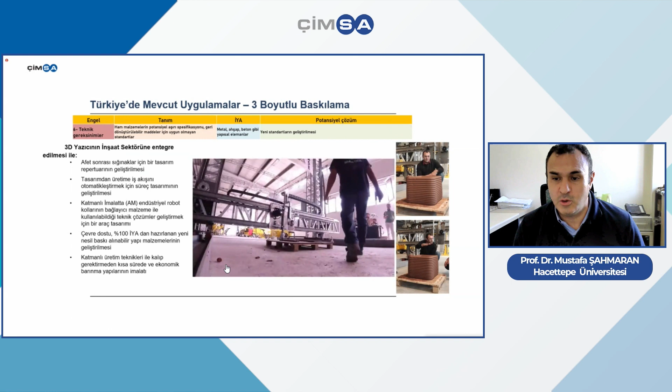This is in Ankara. And this printer was developed with a software company in a collaborative process, and 3D printing mechanisms are also increasing the amount of waste used on site. In 2023's first 6 months, we will be achieving 100% upcycling of the waste, and a one-story building will be applied.

Let me speak about standardization for the materials which will be used for the very first time, and also the construction of the materials. Of course, it is going to play a crucial role. Standardization is essential; it's related with commercial activities and also with commercial certification in order to enhance resource efficiency and contribute to the circular economy in the construction industry.

It is essential to have a safe, secure and standardized database, information system, a knowledge system based on research on site. In a project which we carry on, there is QR technology, a contact-free technology. You see the visuals there, and also material passports, just like the building passports or circular action passport; the collection, operation and processing of the database is being provided.

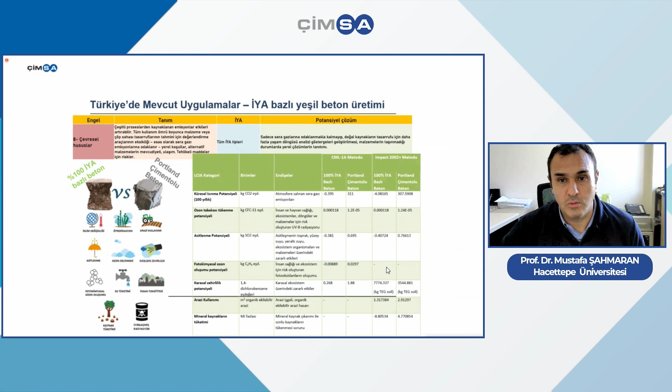And when we look at the categories, the ones made from 100% recycled material have a superiority in their impact on the environment. Climate change, global heating, and carbon dioxide emission are being calculated using the recycled material. All of the recycled and upcycled materials are much better than the traditional concrete itself.

Last but not least, another collaborative action that we will be taking: carbon dioxide binding and capturing potentials will be developed, secondary structural raw materials will be upgraded, and circular solutions will be taking place. In the slide, as I have mentioned to you, most probably within a few months, we will have a pilot test.

This new generation carbon dioxide capturing methodology will bring us better physical features and some additional economic benefits. And by adding some raw materials to these contents, the carbon dioxide from factory chimneys will be bound. With the help of this binding process, the health, environmental and economic features will be upgraded. It will be safely and securely used for new constructions, for new buildings. In our present studies, within 1 ton, you see the factory chimneys simulation.

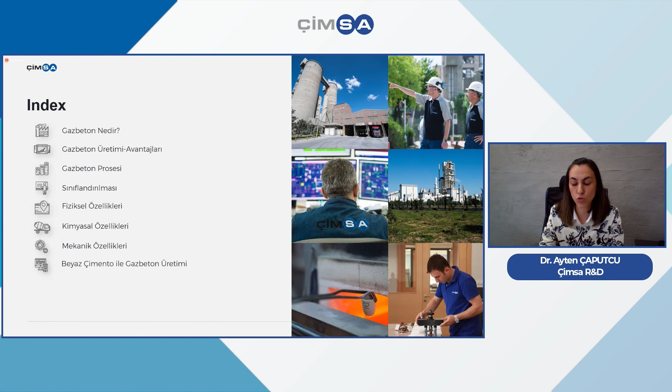We have a study which we have developed. I'm going to speak about gas concrete. Let me tell you what gas concrete is, what advantages it brings us, how we can process and classify it, what its mechanical and physical features are, and how we have developed it with our white cement and what benefits it brought us.

Gas concrete has been defined according to EN 771-4. It is a silicate-aggregate, inorganic binding material composed of lime or cement, with a porous structure, hardened by vapor curing, and it has different application areas. When you look at the process, there is silica, there is lime, and the Portland cement used in normal conditions has been changed in our research with white cement.

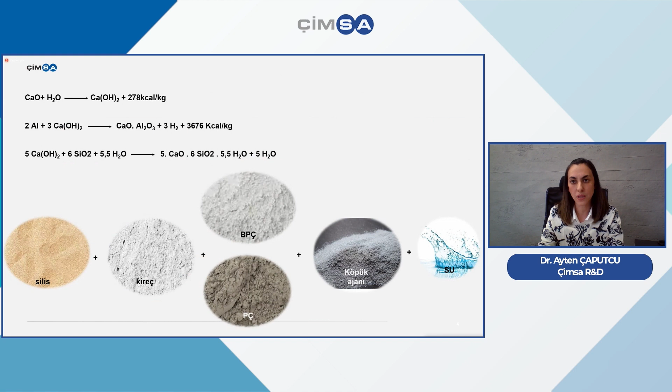And of course, in order to have that foaming effect, there is a foaming agent which we have used, and at approximately 210 degrees Celsius they are being cured, and as a reaction of the materials with each other and with the reaction of lime in connection with water, we are having an aluminium reaction, and calcium aluminum oxidation is taking place, and with silicium it creates calcium hydro silicate oxides, and you see the discharge here.

And gas concrete, as you can understand from its name, structurally 80% has got voids, and for this reason they are highly insulating types of concretes, and it has got a positive contribution. During the summertime we would like to have a cooler climate, and during the winter we want, of course, a warmer environment, and for this reason it is possible to recycle it, and they are very light in structure.

During earthquakes, of course, it is lessening the burden on the building and providing us a better condition, and all of the ceilings and also roofs and all of the binding features are easily being constructed with gas concrete, and it is more durable, at approximately 4.5 hours. It is resistant to flames, and it is a non-flammable type of material.

And when we look at their production in Turkey, approximately 4.2 million, and in Europe 16 million meter cube is being produced. So this shows us that gas concrete is very important for the precast industry, and blocks and insulation plates, and also the doors, and also carrying instruments, and exterior walls, any type of features and elements in your structure.

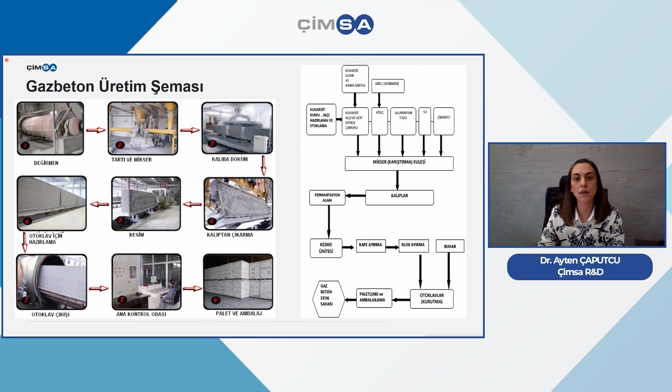When we look at the production phase, you see a mill here, and they are being grinded. And when you look at chemical composition, it is essential to be optimized and measured. It is brought into a homogeneous structure in order to get inside those molds. These are being molded, and you see the caking process. After taking it out of the mold, with the automatic cutters it is possible to slice it and send it to the autoclaving unit under high pressure and heat. It is being cured, and the autoclaved material is being controlled, packaged, and transferred to users.

When we look at the content, all of the foaming system, whether it needs to be integrated in the beginning or the end, whether it is lime-based or concrete-based, autoclaved or non-autoclaved types of classifications are possible. And of course, these classifications do have some pros and cons. And today I'm going to tell you about the autoclaved system.

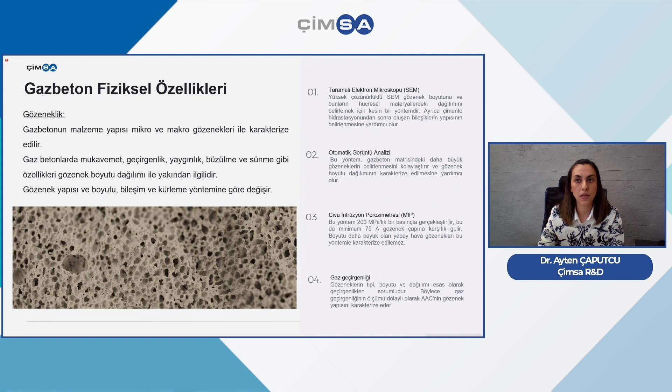So when you look at the physical properties of AAC, I said that it is 80% or more porous material, so micro and macro pores and their connections to each other are important in terms of the other mechanical properties of AAC. And with a scanning electron microscope and porosimeters, we look into the porosity structure of these pores of AAC to see their interrelations and how they will interact with the capacity of the concrete.

Another important factor is the density of AAC, and for certain density levels, we need to add more sand and water and aggregate, because in a few cases, we might have the required density with the appropriate ratios of water and sand. It's important for the stability of AAC in later utilization.

When we look at the chemical properties, we have the ratio of calcium to silicium, and we see different chemical phases. One is gyrolite, another is tobermorite and xonotlite, and CSH phases. So for our study, we are focusing on the tobermorite phase. We know that here the calcium-silicium ratio is 1.75, and this is the phase we see in regular concrete.

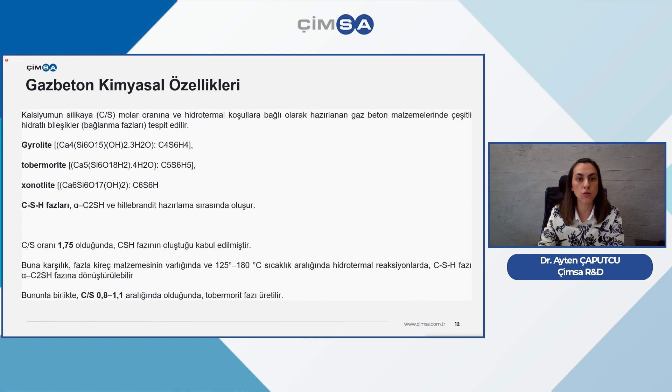And too much calcium, with increasing thermal degrees, changes the phases and transforms the mechanical properties of the product. However, when your calcium-silicium ratio is 0.8 to 1.1, you have the tobermorite phase fixed. And we see that crystalline and amorphous tobermorite is important for this phase, and appropriate porosity is very much related to the stability of the concrete.

And various materials come forth as the reaction product, which will lead to more solidification of the AAC. We have dry densities from 400 to 700, where we have the resistance from 1.3 to 8.5 as well.

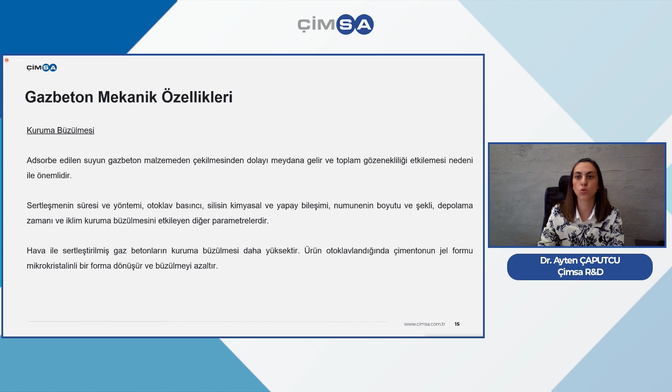And when we look at the drying and contraction, we see that this happens after the water that is adsorbed is removed from the AAC materials. In a sense, when we look at the AAC, we see that the contraction happens after special conditions. However, solidification through air is a factor that actually intensifies this contraction.

Apart from that, durability is very important for AACs as well. The more porosity it has, the more the capacity to inlet gas and liquids. But we should be careful about this, as I pointed out. And the thermal conductivity, as I said, has to do with the density and humidity and components of the material.

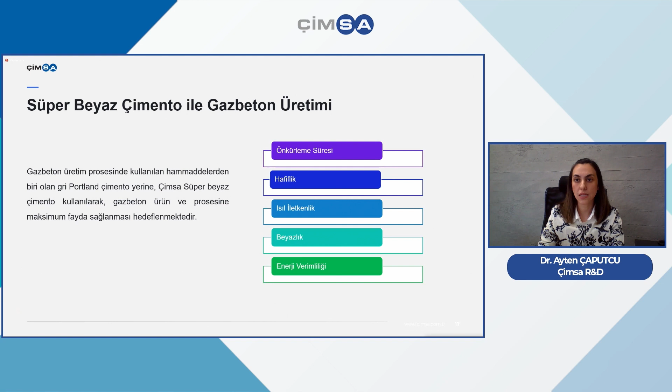When we look at the super white cement used for AAC, as you know, it's Portland cement. Normally, Portland cement is used for AAC production, but we wanted to also use super white cement from Çimsa to see if we could somehow remove or mitigate the disadvantages to provide additional support for its properties.

As you can see here, the first differences between Portland cement and white cement. Here, 60 minutes is the difference in the starting time, and we know that 60 minutes is quite an important duration for our sector. We see that white cement is actually more resistant. So in our study, we replaced Portland cement with white cement, but we kept the ratios constant.

So we can see here various applications. First, we tried with 100% Portland cement and 100% white cement products. We have preliminary curing periods here, so we have a 2.5 to 3 hour difference. As long as the amount of white cement doesn't fall below 80%, so when we have 100%, 90%, or 80% white cement, we see that we have quite low curing periods.

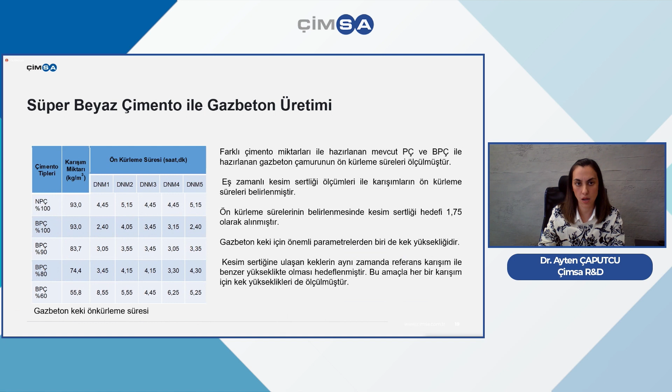In trying to determine these, of course, we try to keep a standard for the properties of the product so that we have similar comparing and contrasting opportunities. And when we look at the following tables for cutting strength, with different levels of solidification, this is a factor also emphasizing the relation between the white cement and a standard Portland cement. And we see that there is a resistance when using white cement.

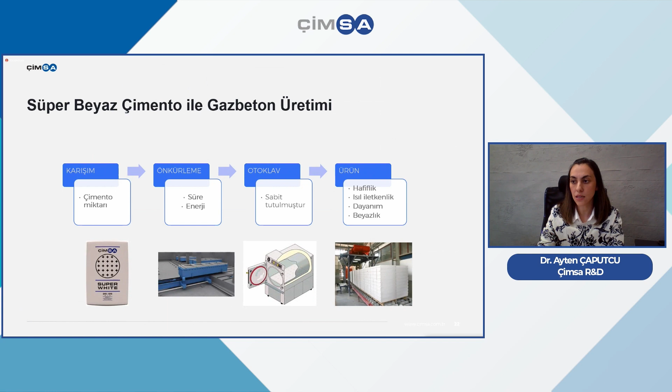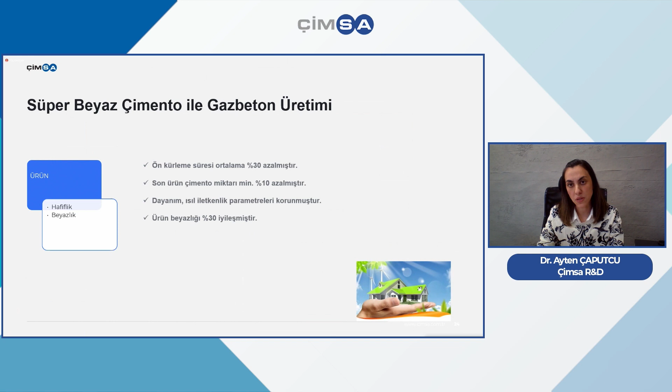When we look at this study, we see that white cement used for AAC was yielding different results. So we wanted to compare and contrast this when we use white cement as a basis for AAC. The preliminary curing period was reduced around 30%, and the amount of cement overall was reduced by 10%. The resistance and thermal conductivity parameters were preserved, and the whiteness of the product was increased around 30% as well.

So together with the reduction in the preliminary curing period, we have improved results for environmental factors as well as emissions. As a result of all of that, preferring white cement instead of Portland cement for AAC production seems to be a very advantageous and viable alternative. Thank you very much for your interest.

Well, thank you very much. It's a really interesting perspective, because standard cement is the only thing we think of using for AAC production. But apparently you have obtained very impressive results with the utilization of white cement for AAC production, and in a period where sustainability is a focus, these are very, very impressive. Thank you very much.